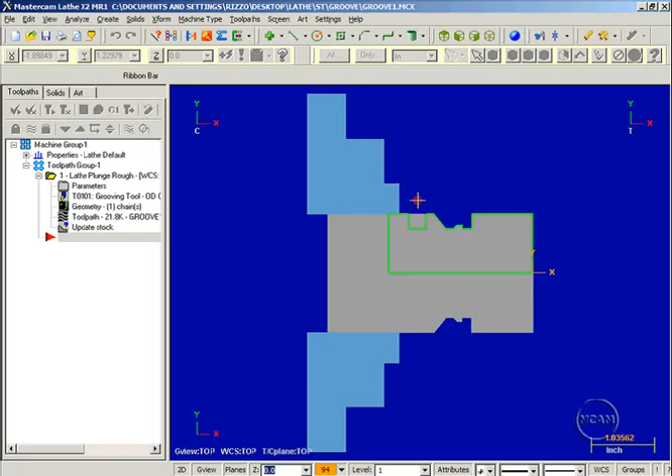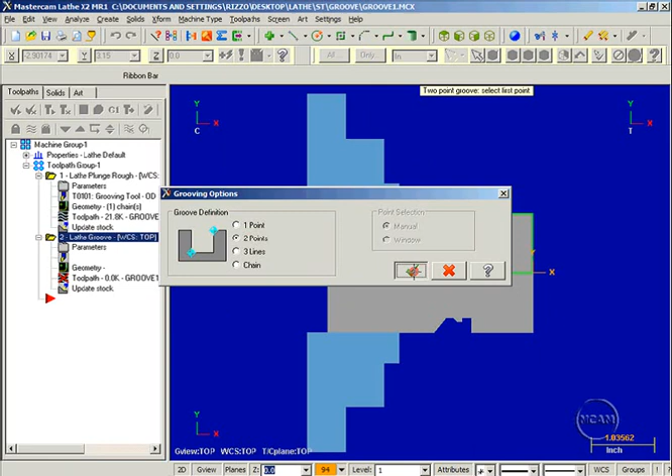For this simple rectangular back groove here, we're going to use a little different geometry selection technique. Start by going to our toolpath and selecting Lathe Groove. And I'm going to utilize the point method, using 2 points to select the opposite corners of this groove. That will adequately define it. Select OK, and then zoom in.

I'm going to select this first point, and then you can see I'm actually drawing a rectangle. And I'll select this other point up here in the corner, and then select Enter. I'm going to use my 1/8 inch grooving tool here, and then move over to the groove shape parameters.

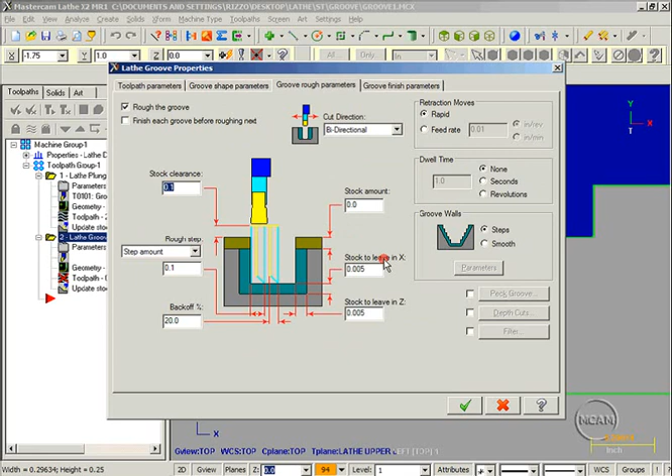Now you notice when using the point geometry selection, I have a whole new set of parameters here available to me, in which I can call out small details of this groove, such as if the walls have a taper to it, or if there's a radius or a chamfer at the top edges of the groove, or the floor of the groove. Now my groove rough parameters are the same as when I use chain geometry, as are my groove finish parameters.

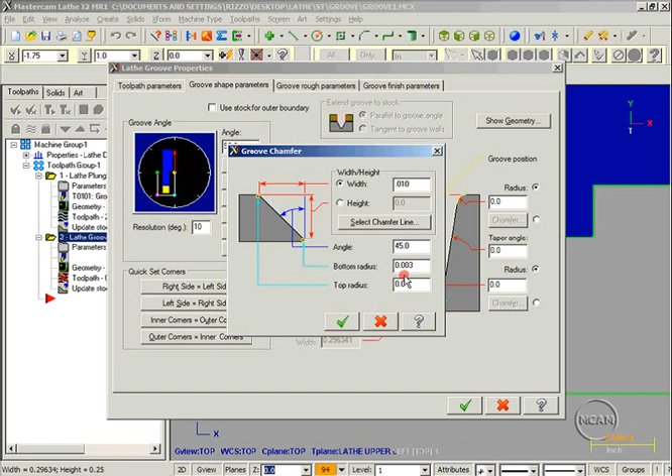Let's go back to the groove shape parameters here and give this groove a few small details. I'd like a chamfer at the top edge of this, just a small one, to eliminate the possibility of any burrs there. Let's give it a 10 thousandths chamfer of 45 degrees. I can also specify a small radius at the bottom or the top of the chamfer too.

Now if I'd like the same chamfer on the opposite corner here, I select this button here, right side equals left side. These parameters here will be transferred automatically over to the right side. If I'd like a little detail at the floor of this groove, I'm going to give it a radius. Let's exaggerate it a little bit so we can see it. We'll call it 25 thousandths on one side and 50 thousandths on the other.

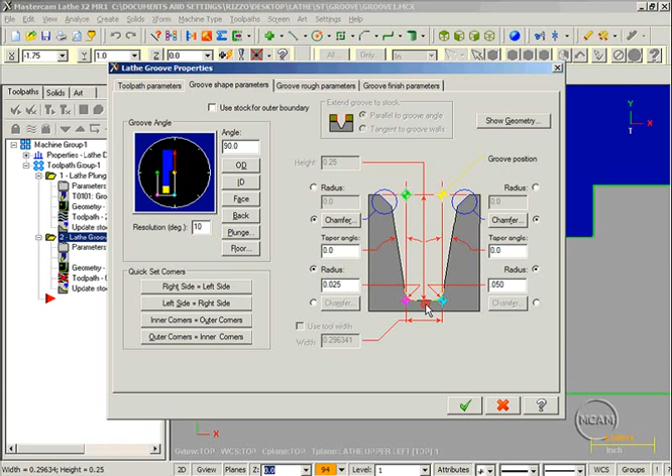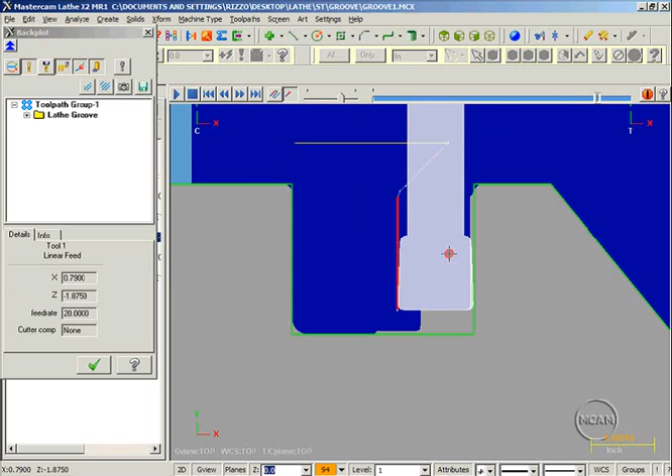I'm going to click OK, and then backplot that toolpath and zoom in. We can see the roughing pass, and then the finish pass here, where it's cutting that small chamfer with that little radius at the bottom of it, and then it goes down to the floor and cuts the radius in the floor corner, and comes up the other side, cuts the chamfer over there, and cuts the larger radius on the floor of this corner, and then rapids out.

So in summary, when using the point selection method, there's some very powerful tools. We can fine-tune the shape of our groove here.